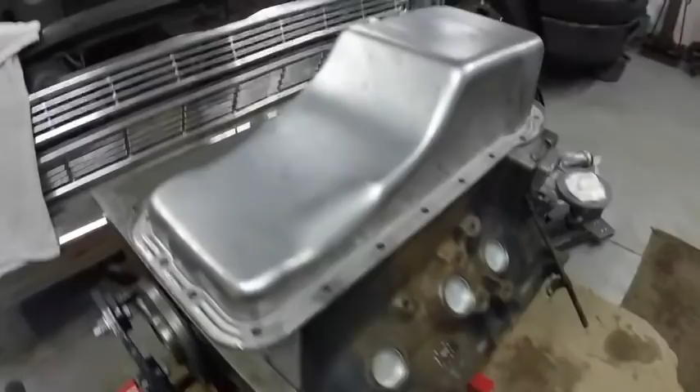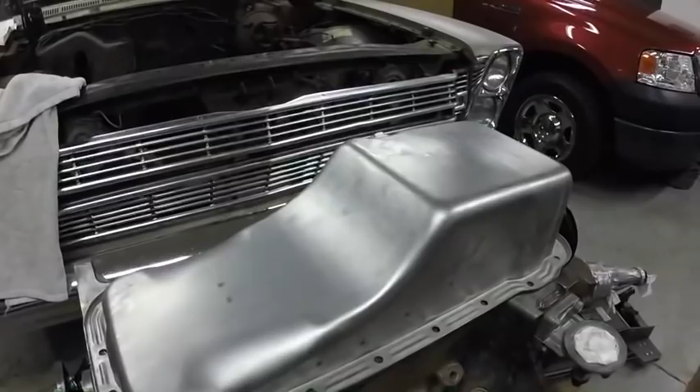As you saw in the last video, the oil pump was already installed, so now the next step is going to be installing the oil pan. I didn't have quite enough clearance between the pickup and the sump, so I put the sump in the vise with a block and some towels on it and just kind of pushed this down until I have the proper clearance, which I do now.

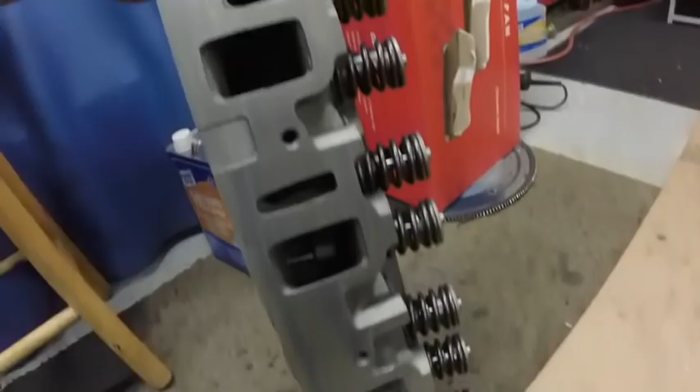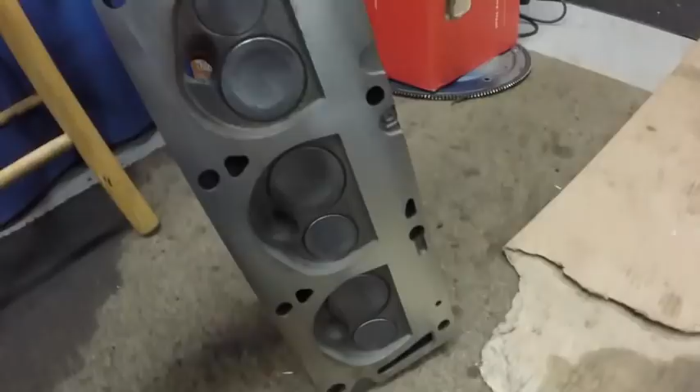So I want to show you some other things too. So I did get the heads back, nice and clean, all resurfaced. He said that these heads were in amazingly excellent condition. He said the valves were good, the guides were good, there was no wear in them. They did put the little umbrella seal down in there, and these heads are now set to run.

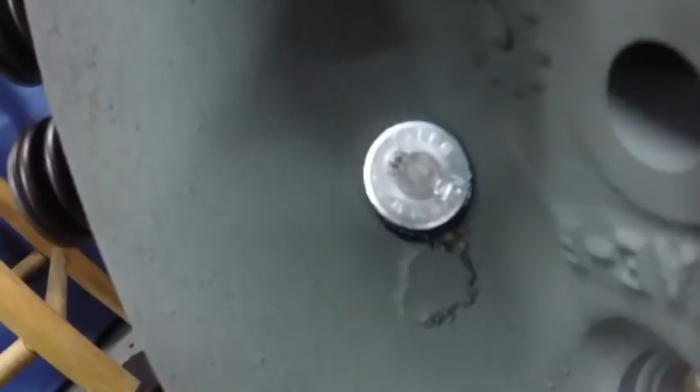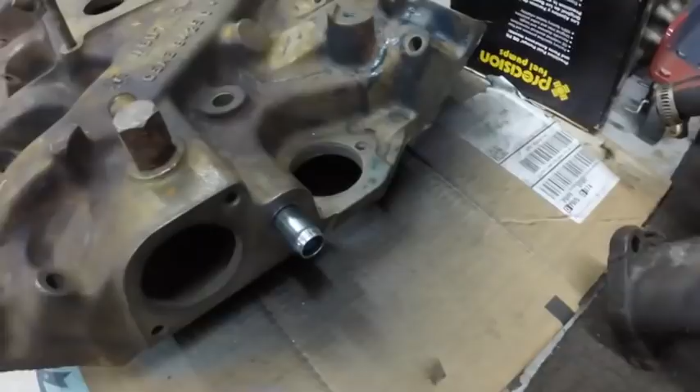I don't know if that shows up there or not, but it says that they are set to run unleaded gas, and there's one of those on each head. And I changed this nipple, and then I realized after the fact I'd pushed the wrong button on the camera. But I took a flat punch and just kind of flattened the old one in and punched it right through. And then I took a block and a hammer and just tapped the new one in with a little sealer around it. So hopefully that resolves the problem.

So there's a button here on the top, right there, that starts and stops, and that changes the mode. And I think I push this sometimes, not realizing that I'm pushing the wrong one, and then I miss out on video when it's this one I need to be pushing.

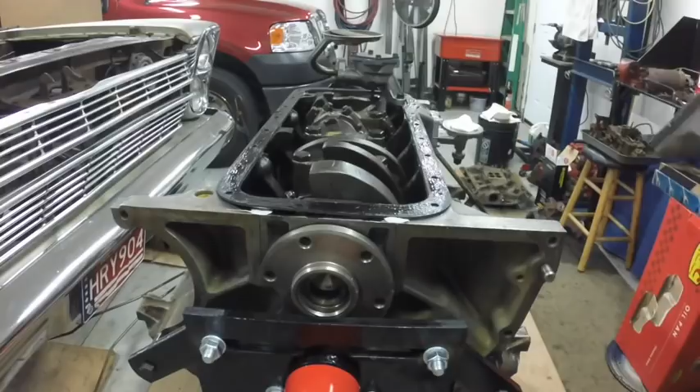Alright, I put a little silicone down in those spots there, and the gasket's pretty much all in place. Has a little bit of sealer on it. Alright, there's like 20 bolts here, so I'm probably not going to bore you with starting 20 bolts and tightening them up, but that's what we're going to do here.

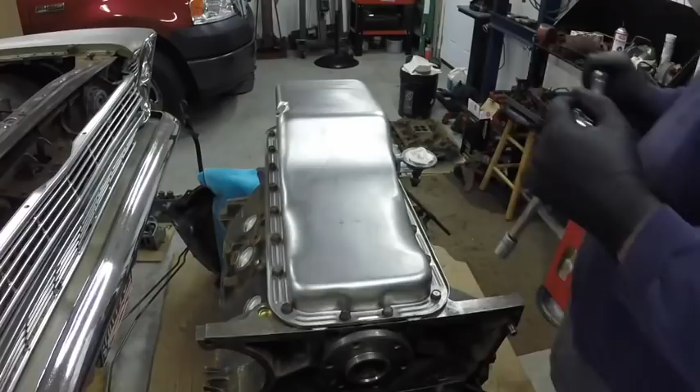So I just went around and torqued them all to 12 foot-pounds, and I went around the pan about 3 times like this, until when it clicked it didn't turn them anymore, because that gasket does compress down slightly as you go around and tighten them all, and then you go around and hit them again and again. So I just go around a few times with it set at 12 foot-pounds of torque, just to make sure that they're all good.

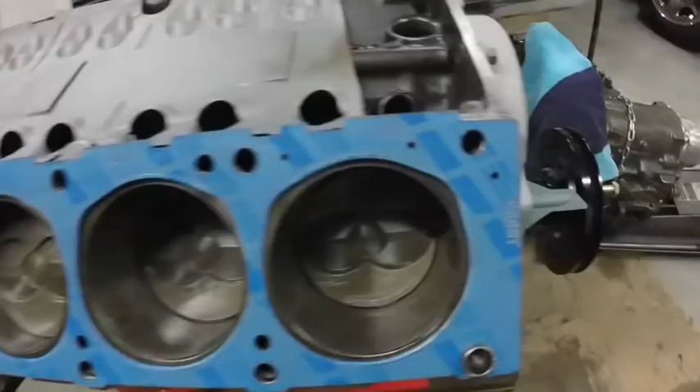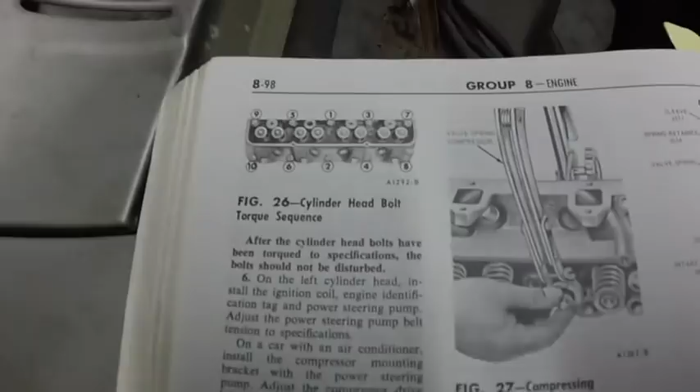So I'm going to clean up the deck, just wipe some of the oil off, and we're going to get the heads on. And it says front on the head gasket, and these go over the dowels, and I think we're ready to throw the head on. That's the tightening sequence for the cylinder head and the torque specification. 352, 390, 410. You do it in steps: 70, 80, then 80 to 90. We're going to run them up to 90.

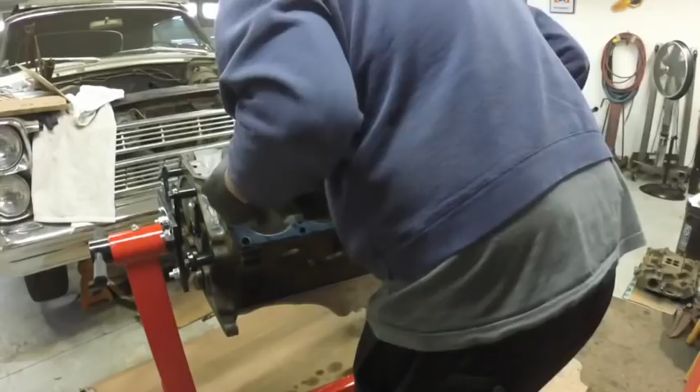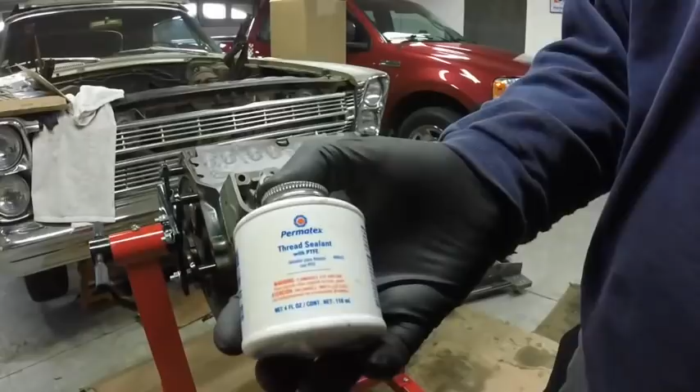Alright, so let me set the head up on the engine here. And get a couple bolts started. These bolts go into dead holes, so I don't need to put bird poop on the threads. And when I say bird poop, if your bolts go into holes that are going to the cooling jacket, you need this on the threads to keep them from leaking coolant. But I'm going to just go around and put all the bolts in, and I'll get them torqued up. We'll stop the recording right now.

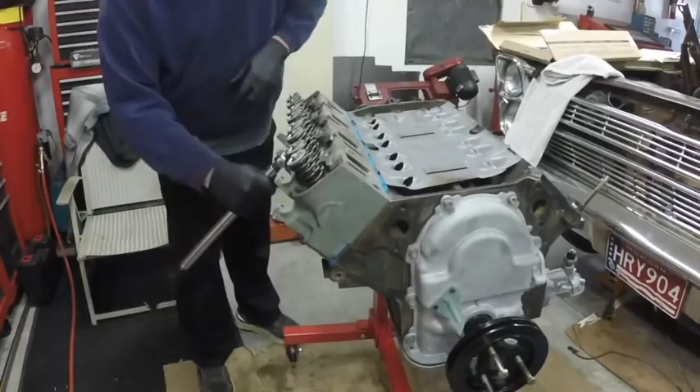First round I'm going around doing 50, then I'll do 70, and then I'll do 80, and then 90. So that one's 50. I just started these. That one's 50.

And then the next step will be 70. And then just double check this one. Yeah, I did it. Okay, now 70, and then we'll go up to 80 and then 90. All right, they're all set at 90, and then I just go around a second time and just double check.

And there we be. I cleaned up the bolt heads, so when I paint it, they look nice. Alright, let's get the other head on. And once again, it says front on the gasket.

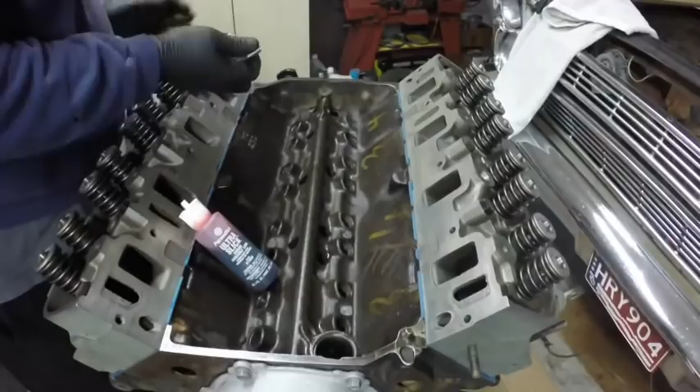Alright, I just had to pull the lifter pan out rapidly. I forgot to put the tappets in the lifters, so I'm going to do that right now. This is where the assembly lube is going to come in, because I'm going to lube the heck out of the bottom of the lifters and the sides, and like I say, I'm going to pump this engine up with oil pressure before I put it in the car. With the distributor out, I'm going to just run a socket on that oil pump drive and get oil throughout the motor.

Alright, all the lifters are in now. I put the pan back in. Now the intake is ready to go. The intake has to go on before the push rods, because the push rods go through the intake, so the intake is next. Well, as you remember, I had a push rod, and it was this rod right here, and see how there's machined surfaces here? There's one there, one here for the push rods. Well, this one was not machined out very well. It was a bunch of flashing hanging over. So we just cleaned it up with the angle grinder.

And this one. Then I think it's 9 here. And this one, which is about 10. And 11 and 12. Something like that. Anyway, I'm just going to go around and double check all torques. Might do it a couple of times.

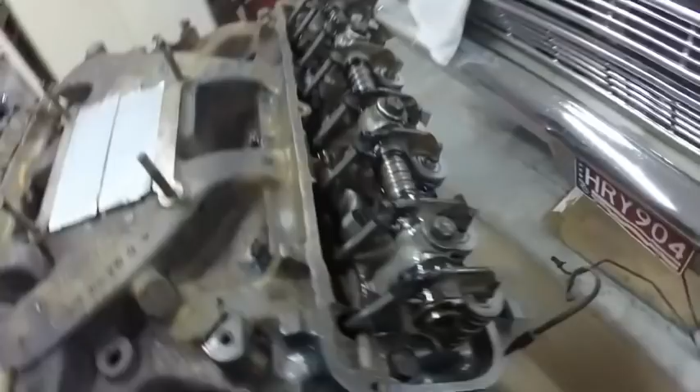Then I'm just going to go around one last time and make sure they're all good. So I got the push rods in, and I put the shaft on this side, and you set the timing marks to specific places, which it outlines in the shop manuals, and then you tighten these. It tells you which ones to tighten two turns at a time, so you don't bend the shaft. And then I'm going to put the other one on, then it tells you where to set the timing marks.

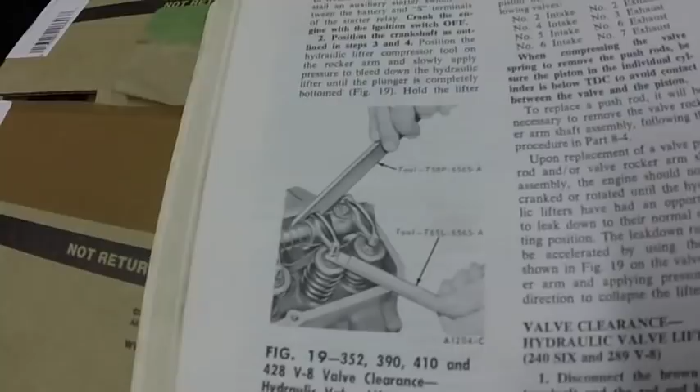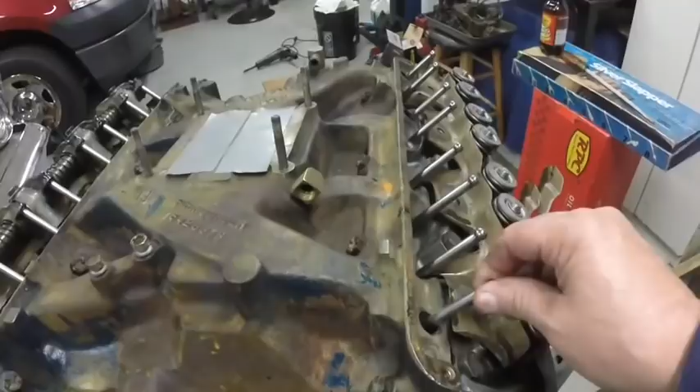Check the valve lash. Well, this is a hydraulic cam, and they show using a special tool, which I don't have. But they do talk about specs further in the book, and with the lifter totally collapsed, what the gap should be, so we'll get an idea. I mean, they're the same exact length push rod that I took out of the motor. I measured them, they're identical, so I think it'll be fine.

I don't think he took but a couple thousandths off the head to clean the parting surfaces, and the valve stems won't be up that much higher from the valve job, maybe 2 or 3 thousandths, but we'll check it anyway. Okay, this one has an oil galley in that hole, so that one takes a special bolt. If you notice, these bolts are all the same except for one, which is this one. This one goes in that hole.

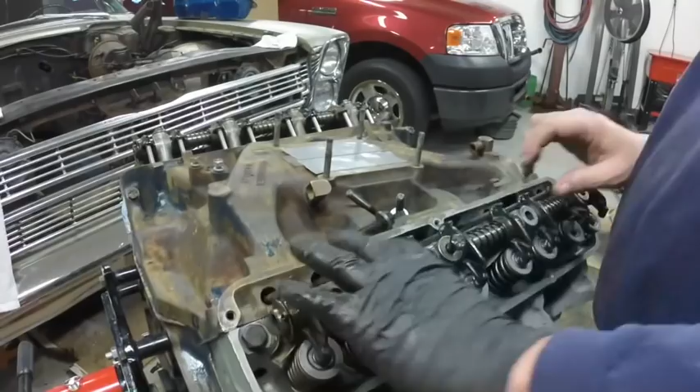So I'm going to put a little drop of oil on the top of all those. Push rods are already oiled where they go in the lifter. And I oiled the bolts where they thread into the engine block. This is the bolt that goes in that hole. Just snug them down a little at a time, in case any valves are open.

Okay, both rocker shafts are just hand tight with a ratchet. I have not torqued any of the bolts down yet. I'm just going to turn the motor over a couple of times. And that just kind of seats everything in, then I'll torque the rocker arm shafts to specifications. That was the push rod that was rubbing, and it looks like it all clears.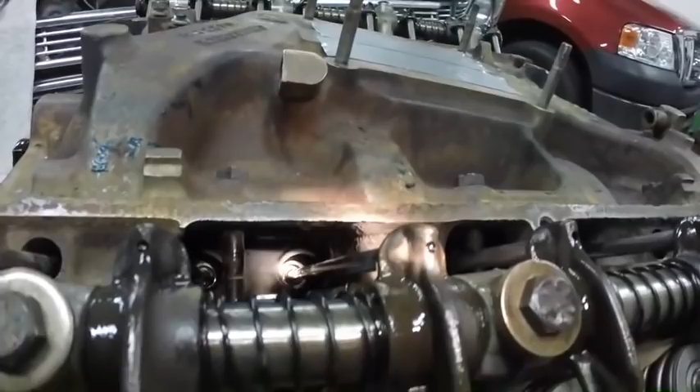Well, you're not going to see it with the camera, but I can see down in there, and it clears everything in the casting there. Everything looks really good. But you can definitely see it was rubbing on it at one time. There you can see the lifter down in there. So everything looks good. These are all torqued down, 40 foot-pounds.

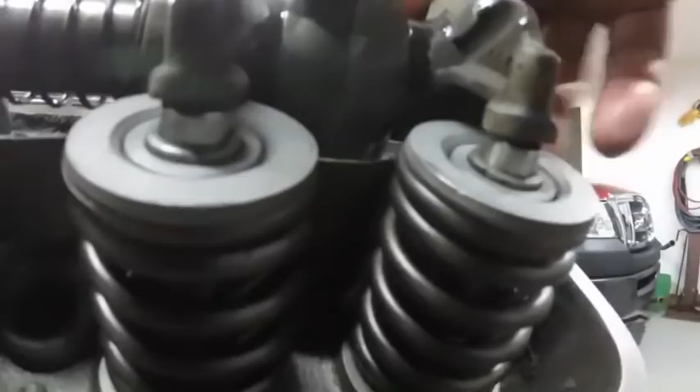The valve lash, they tell you, now these lifters are new, so there's no oil in them. They give you a spec and they tell you to collapse the lifter. And that spec is pretty big, so I'll get a bunch of gauges out and measure it, because I don't have the special tool, so I'm just going to have to wing it with a gauge. Now that's for the mechanical cam. This is a hydraulic cam.

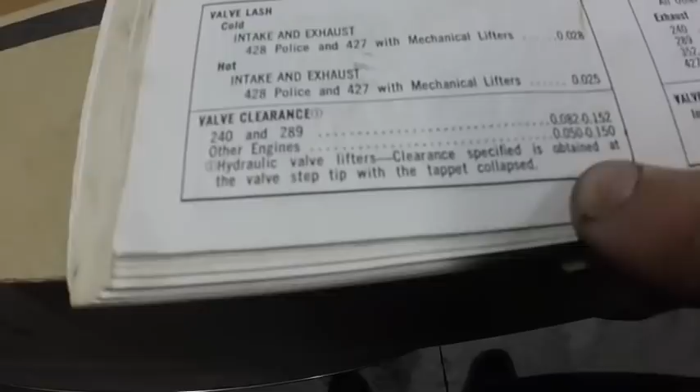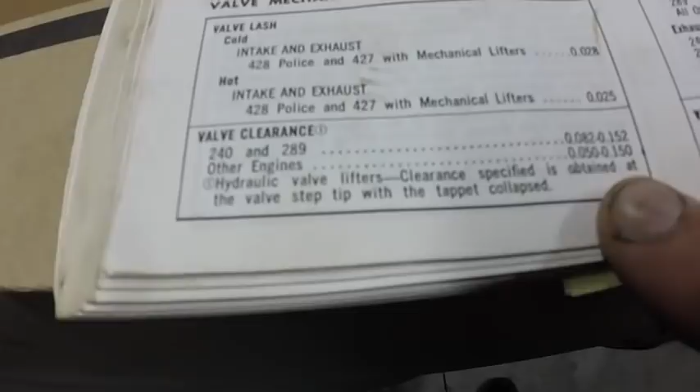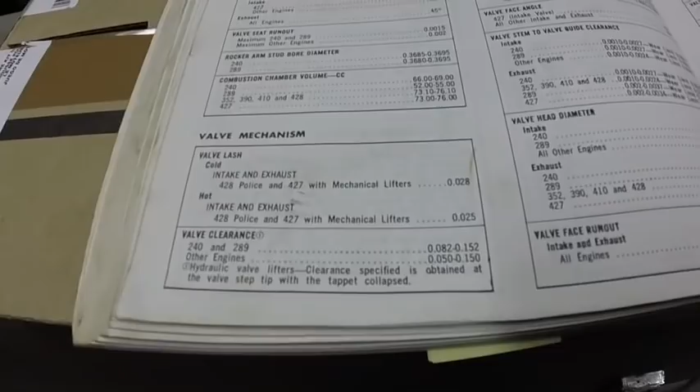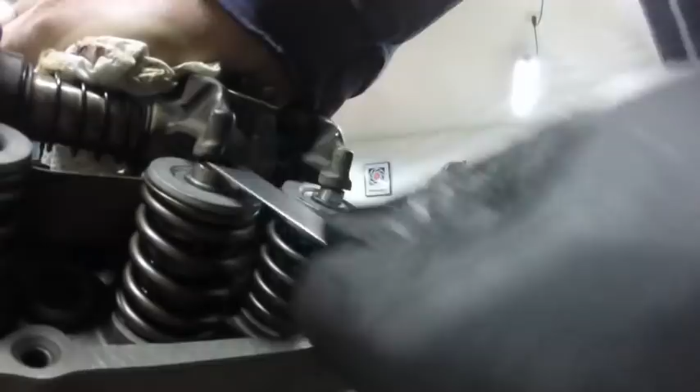And it says the 240 and 289 are one spec and all other engines are this spec. And you saw the special tool in the other thing, so we'll see if it's even somewhat close. You can get push rods 60 thousandths over and 60 thousandths undersize. So they're within that specification range. That fits in there pretty good, and I went around and did a number of the ones that are closed, and I'll show you what I got.

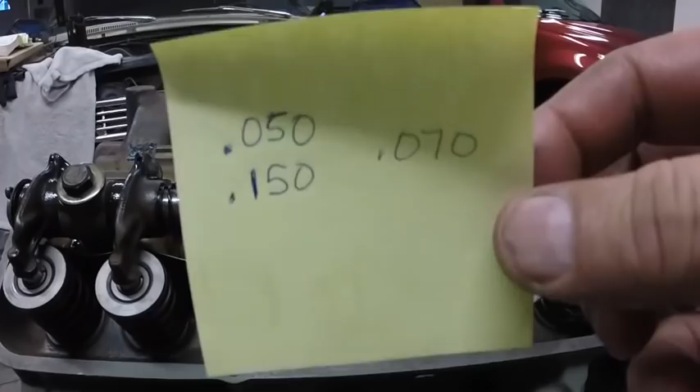So the specification is on the left, and what it was is 70 thousandths. So we're going to call it good, and I checked numerous valves that were closed. It tells you when you're on TDC number 1 which ones are closed, and you can turn it 180, and it tells you which ones are closed. They're all pretty much spot on, 70 thousandths. I'm going to call that good, as the engine I think was fine before it was disassembled. And these new push rods are exactly the same length as the factory original ones.

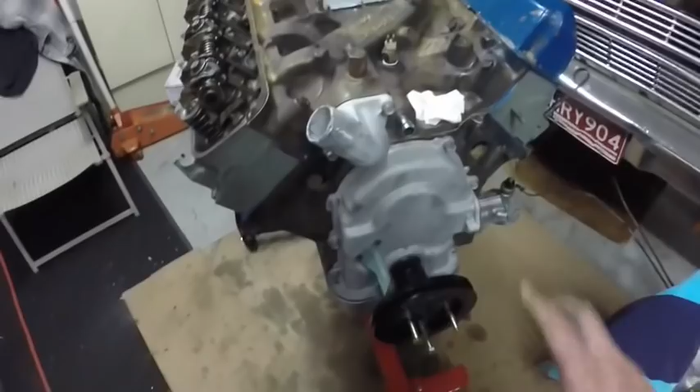Alright, I think I'm going to call it a day. Like I say, I covered these up just so nothing gets dropped down. I got to bead blast the valve covers and install them. I got to get a water pump. I got to get a thermostat so I can bolt that on. You know, I want to paint it all. That stuff's going to be blue.

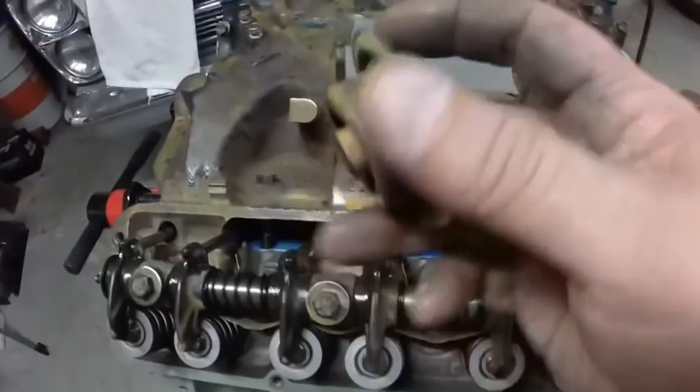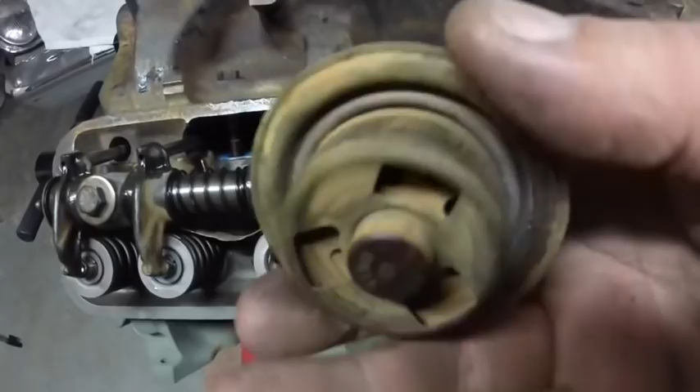This is the thermostat that was in there. It's a 160. I don't know if that shows up in there or not, but it's kind of wampus. It says Robertshaw Controls Company, 370F-160 degree, towards radiator, with an arrow pointing towards this end. And I think it said 160 on that too. So I think I'm going to call it a day.

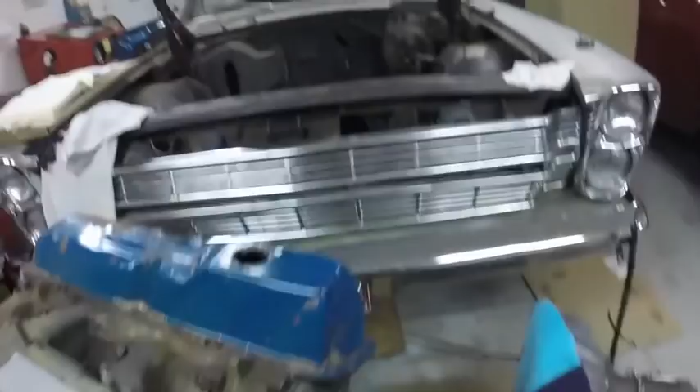And oh, one other thing, it's all pretty packed up, but I did get the complete exhaust system, and so that's all in the box. My head bolts are no longer on the fenders.